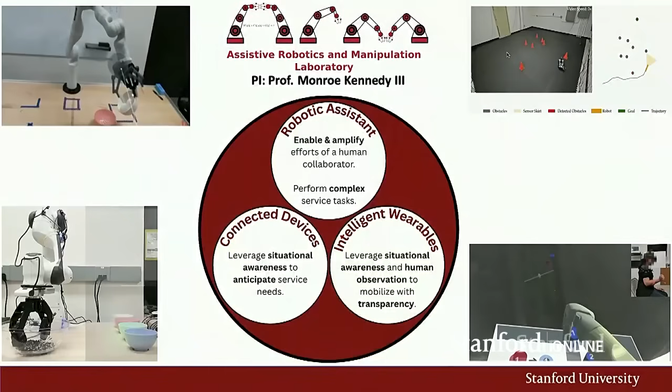Thank you very much. I guess I'll go ahead and start. I think it's a very interesting question, and the space of robotics moves so quickly, it's hard to give an accurate prediction in the very distant future.

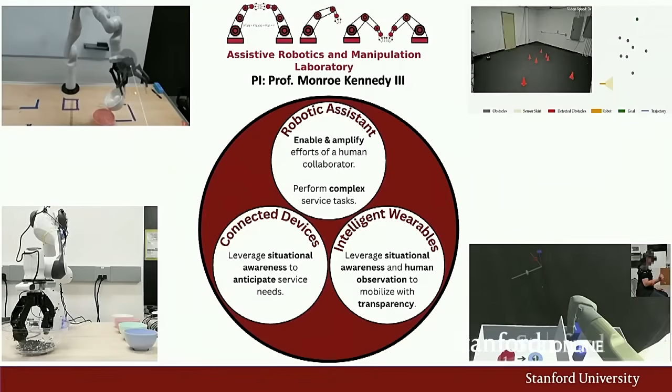I think a good indicator to use is asking the question: what are society's needs, and how might robotics provide that type of solution? We have a lot of really important needs for robotics even today. I'll take a few that come right to mind.

If you think about the world's aging population, many people retain a lot of their cognitive function, but as you get older, it gets harder to move your hands, and you might need someone to come help you do things. If you don't want to move to a facility, if you'd like to stay in your home, are there enough people to actually come in and do those tasks for you? Or could we have robots that could come into your home and do those tiny dexterous tasks that might hurt or become challenging for you to do, giving someone the chance to live on their own even longer.

If I move to manufacturing, think about all the tasks of assembly. It's actually impossible for us to make a pen here in the United States—if you think about the cost of labor and how much you can sell that pen for, we can't make it here. But if you wanted to onshore the assembly of different things, what does it mean for robots to be able to do those types of tasks?

Or agriculture—if you think about harvesting and planting, those conditions are hard for people to work under and have been since forever. What does it mean to have a robot go into those spaces and do those types of things?

And to the side of wearable systems, if someone has some sort of amputation or begins to lose mobility, can a robot actually be a component of you and enable some of those motions? How would it extract your intent? If I have a robotic arm, I don't want it to do whatever it wants—I want it to do what I want. But if I have the inability to fully command every single joint and motion, I need a system that can understand what I'm trying to do, take whatever cues I'm able to provide, and extrapolate how it can best be an assistant and allow me to do something fairly complex. These types of questions are central to what my lab thinks about.

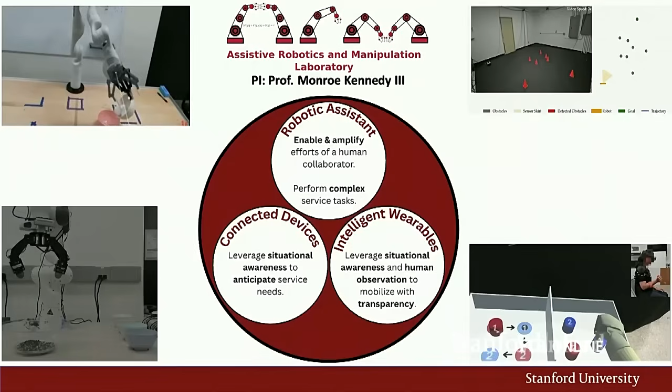You'll see on this slide us answering this question in many different domains. In the top left-hand corner, you see us, from a first-person perspective, using an augmented reality headset to see a scene and understand how a robot should move to help you perform a task like pouring.

In the bottom left-hand corner is our work on DenseTact, where we're improving the tactile sensing of robots so they can do those complex tasks we talked about.

On the bottom right-hand side, again you're seeing an augmented reality first-person view, and my student in the top right sub-corner is actually controlling a virtual prosthesis to perform a manipulation task, where the system tracks where she's looking, and then with very small cues from EMG, her muscles, she's able to tell it and give it the arm cues on what it should do next.

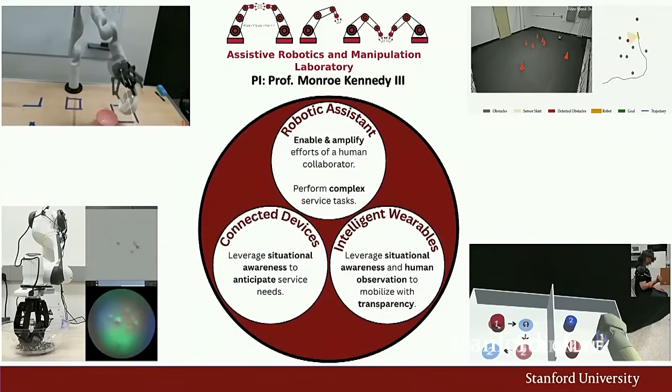And in the top right-hand corner, we have an autonomous car that actually learned how to drive and avoid obstacles by watching people. I'll go to the next slide here.

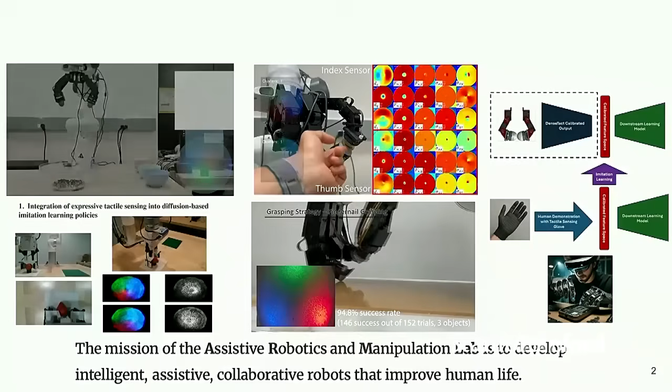But one I'll focus on as a key aspect was the motivating example I gave you a moment ago. We want robots in our spaces doing the really complicated tasks. What does it take to really bridge that gap? What are some of the outstanding challenges, and what might we see robots doing in the next decade and years to come? I think that really comes down to the utility and usefulness of robots being able to handle dexterous tasks.

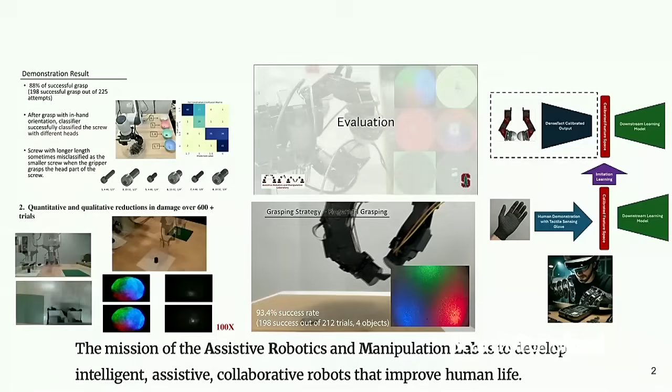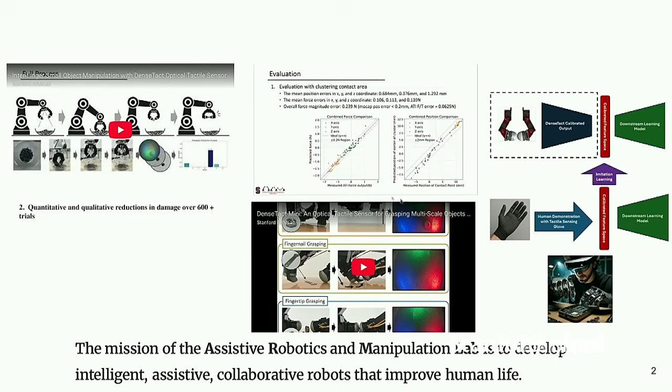In the top left-hand corner, you saw a robot reaching into a bowl of screws and sorting them. This is our work where we can reach into that bowl and, just from feeling, determine what we're holding. In the bottom left, you saw us picking up a strawberry many, many times, and we're able to characterize how much damage to the fruit we're causing, and how the sense of touch, being gentle, allows us to move these fruits so many times without damage.

In the bottom right-hand corner, you see us doing work where we're able to pick up small items off of tables and do those similar types of tasks.

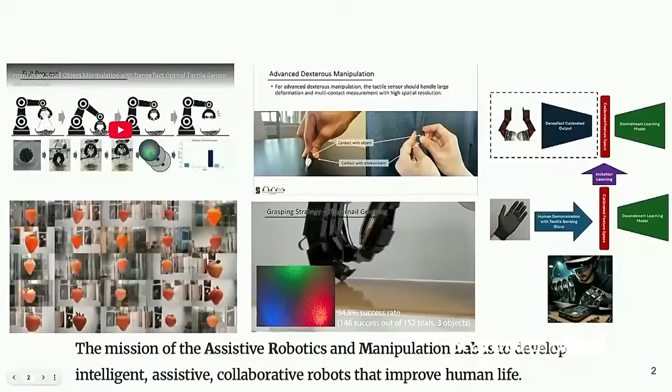So my lab is asking the question: what does it take to make these robotic fingers capable? One part is sensorizing them. The other part is figuring out how we can extract abilities from people to do these complex things. So I'll end with this video of this sensor I'm holding in my hand. This is one of our DenseTact sensors. We're continuing to make this smaller. This sensor costs a little bit under $40. Most of that's the cost of the camera, but we're continuing to shrink that down. This is a very important step towards bringing robots into the spaces to do the complex things we need them to do.

That's wonderful. I want to come back to that soon, but I want to give you, Professor Zhao, an opportunity to talk a little bit about your vision for robotics and your research.

Yeah, so my lab at Stanford—first of all, I'm in the same department as Monroe, and we're both in the mechanical engineering department. Mechanical engineering really hosts a lot of multidisciplinary work.

In my lab, we specifically work on soft materials, soft composites, and soft robotics. We're excited about soft materials because when we talk about robotics having better interaction with human beings, my lab focuses on developing miniaturization of soft robotic systems so that we can use these systems to guide robotic surgery. That's what I'm going to talk about next.

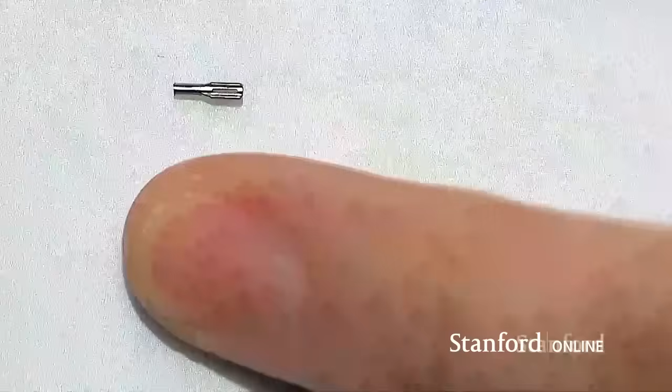And that system is actually extremely small. If we can switch to the camera, I brought one device and I was worried about losing it, so we have it here. I can probably put it next to my small finger for reference, because that little thing goes into the blood vessel. It's roughly 1 millimeter in diameter.

It's coupled with the aspiration catheter, and once we turn on the device, you'll see how fast, in a couple of seconds, it shrinks the size of the clot from this big to only 5% of the initial volume, greatly enhancing the possibility and reliability of mechanical thrombectomy for clot removal.

More recently, we're collaborating, Monroe and I, on the next frontier, the next generation of robotic surgery. Can we play the top right video? Two videos actually, top right two videos.

There's a tiny magnetically controlled spinner that is navigating in this true-to-size cerebral artery, which is a vasculature in the brain. Now we can use a magnetic field to drive the navigation of the magnetic spinner.

Can you click on the second video, the very left, top right video? So this is actually a real blood vessel, and the magnetic spinner is navigating in this blood vessel. It swims super fast in the blood vessel.

Can we move to the bottom video? The last video I'd like to show utilizes the same spinner thrombectomy mechanism. You see the small magnetic spinner digesting the clot, and it's not causing any fracture or fragmentation of the clot. It simply eats the clot, carries it, and goes all the way.

We really believe this is a very promising technology that can better save patients' lives. I can give everybody an example: at Stanford, the physicians are all neurointerventional radiologists, but we only have 4 people who can conduct surgeries like this. They need more than a decade of training so the surgeon can actually perform the technology based on interventional radiology.

But if we now come up with a robotic system, everything is automatically controlled. We have a robotic arm that just provides the magnetic field, so a small magnetic milli-spinner can navigate in the blood vessel, get to the clot, treat it, and go all the way back, finishing everything.

For a lot of rural areas where we don't have very skilled doctors, those patients cannot be transferred to a hospital that has the facility or doctor to treat stroke, and very likely those patients will just wait there and die.

So we don't want that to happen. We just want to change that fact, and eventually we have this robotic system ready, and with Monroe's help, we're creating that closed loop system to be coupled with the fluoro guidance, which is the X-ray system for imaging.

So first, talking about the current mechanical thrombectomy technology, I'll briefly introduce the procedure. These are all based on catheters and guide wires over one meter long. These systems go from the leg, the femoral artery, femoral vein, and all the way to the brain. A lot of patients, especially stroke patients—think about our brain.

I have an image at the center showing the highly tortuous brain vasculature. A lot of patients cannot be treated by mechanical thrombectomy technology because the catheters simply cannot reach the disease site. It's too tortuous in the brain, and if the catheter does not navigate that highly tortuous environment, it doesn't reach the clot, and the patient will not get treatment.

Now with the robotic system, switching to the magnetic milli-spinner, there's no tether. We don't worry about the navigation capability. Navigation isn't only about how good the catheter is, it's also about how skilled the physician is. So if we replace everything with robotic control, basically we don't need to train a physician for 10 years just to learn how to use the catheter to navigate brain vasculature.

Now we have that small magnetic spinner controlled by the robotic arm, which can be trained and coupled with X-ray imaging to map 2D images to the 3D vasculature of the brain. And with Monroe's help, he can design the robotic control to very accurately navigate, steer, and control the robotic motion and position in the 3D brain vasculature, easily reaching the clot site. We don't worry about human error causing access problems or difficulty reaching the clot site.

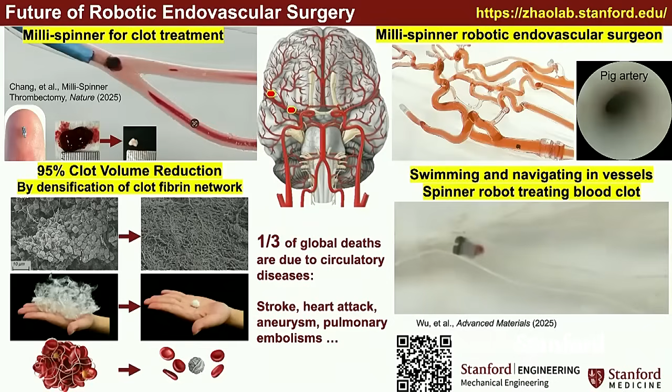Sure, do you want to start us off? Yeah, I think the best way is to start on this slide. If you look at this picture of the brain, you can imagine a clot site you'd want to address. As Renee laid out, if you don't want to send a probe all the way up there, you send the magnet instead. The magnet is inserted at the entry point, and the robotic arms guide it to that point of action, perform the action for you, and then guide it back out.

And it's connecting just through magnets? Just through magnets, and then X-ray to perceive where it is inside the body. The robotic arm has been trained, analytically or through data, on how to guide that magnet through these systems, which are going to be unique to every human.

Yeah, this is very exciting, and I want to move away—so we kind of went right into the human body and where robots will be in the human body. I'd like to take a step back and stay with you, Professor Kennedy, for a moment. Something you've said that really resonates with me is that the biggest barrier to robots being in the home is a sense of touch, or even more nicely, a sense of human touch.

So I'd love for you to unpack that a little bit, and Professor Zhao, I'd love for you to build on that. If you think about the future of robots, in the not too distant future you might be asked if you want a personal robot in your home that can do all of these things, maybe about the cost of a car. What would you need it to do in order to justify that cost to you?

Right now there are certain social robots that exist. They can roll around your home, some can do some vacuuming for you—maybe you own a Roomba. It can connect you with video calls, but it can't really do your laundry yet. You have the dishwasher, but you have to load it, or your kids have to load the dishwasher. This is not really meeting the need yet.

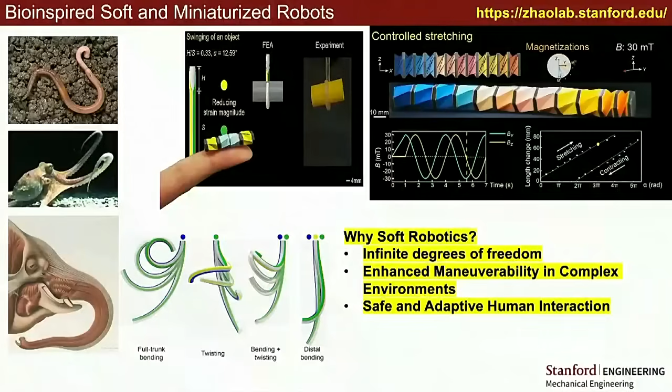Professor Zhao, I would love to take a slightly different tack, coming back to some of your experiments and research on soft materials, and thinking about the wonderful examples of using soft materials or millimeter-sized robots to get into the human body. What are some of the other use cases you see with these stimuli-responsive materials? Where do you see, if we have a human arm, an elephant trunk arm, and how might that be utilized? What are the special use cases for some of these? I'd love, if you can, to also touch on the origami robots. We've seen a lot of videos. I highly recommend going to both their labs. They have a lot more, but some of the coolest are the origami, especially some of the origami ring structures. So I'd love you to think about, as you're thinking about these stimuli-responsive materials, where do you think they're going to be used? How are they going to be used in robots out in the world?

Certainly. So when we talk about stimuli-responsive materials, these are things that can, at some point, replace very bulky systems made of rigid robotic system components like motors and all the cables. Stimuli-responsive materials are largely based on the deformation of soft systems or deformable structures like the origami system you just mentioned. So the deformation of these systems creates motion. It's no longer relying on the motor creating degrees of freedom.

Now it's basically the material points that we stimulate. It's like if you have a needle to stimulate your tissue, you will feel that pain. So basically that does the same thing on the soft materials. We stimulate every material point on the soft body, and the deformation leads to locomotion or leads to functionality.